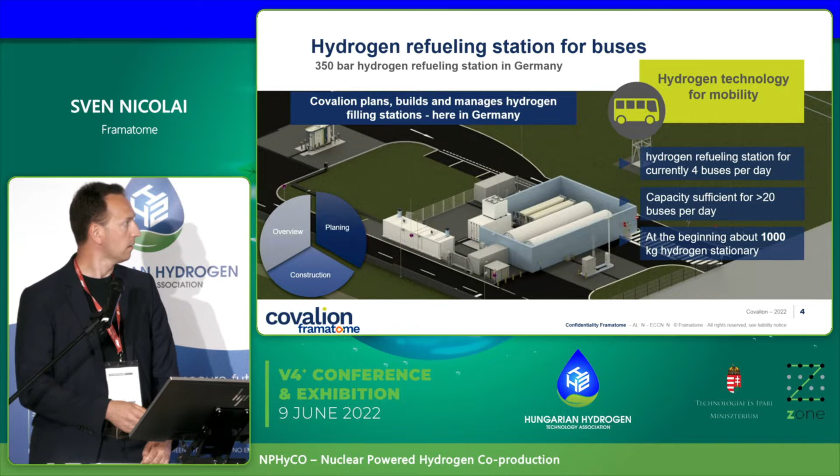Here is an example of the hydrogen refueling station we recently built in Bielefeld. In the beginning there was planning. We build and manage hydrogen refueling stations.

This one here is for 4 buses per day. The capacity is sufficient for a larger version, 20 buses per day. And at the beginning, we started with 1,000 kilogram hydrogen stationary storage.

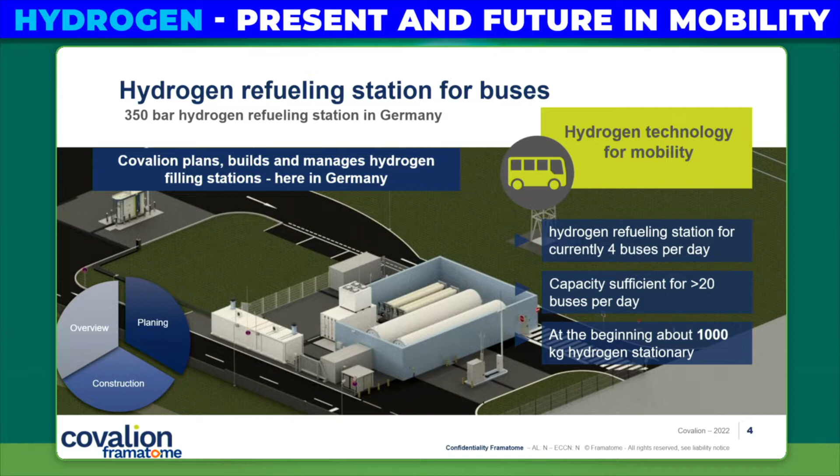Here is a picture taken during commissioning from the top. We did the execution of construction work on site, planning, hydrogen infrastructure, and commissioning.

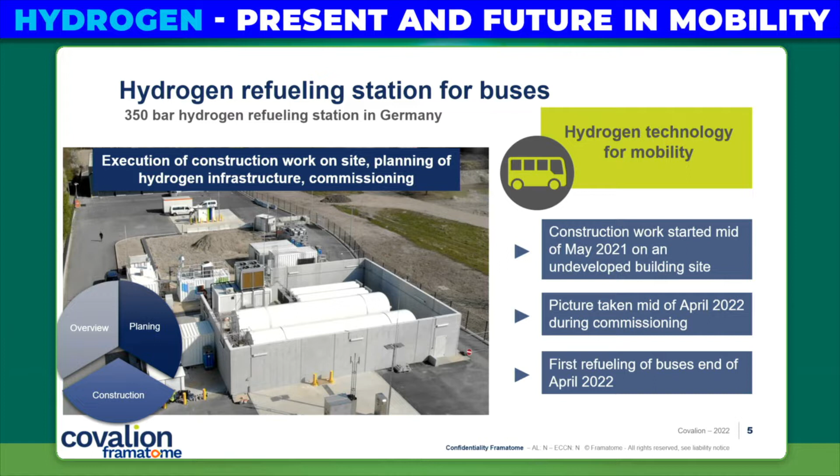Construction work started in May 2021, and this picture was taken two months ago during commissioning in April 2022. The first refueling of buses was at the end of April 2022.

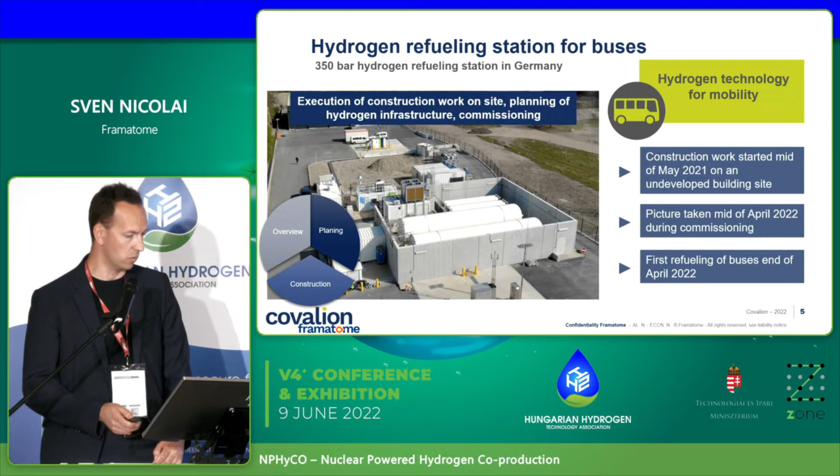So here's an overview of this location. We have the plant control, we have the hydrogen supply via trailer on the left side. We have 2 storage areas: one 500 kilogram at 50 bar, and 500 kilogram at 500 bar.

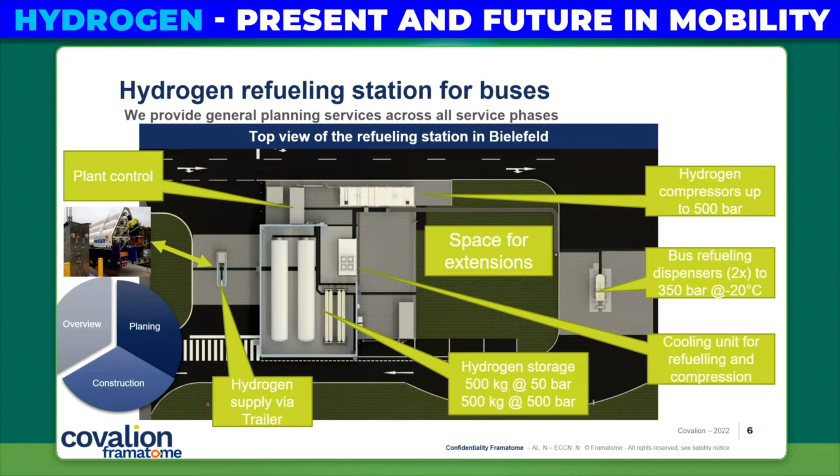There's a hydrogen compressor for up to 500 bar, the cooling unit of course, and then the bus refueling dispenser with 350 bar, times two. And then we have the space for extension for the larger 20-bus version.

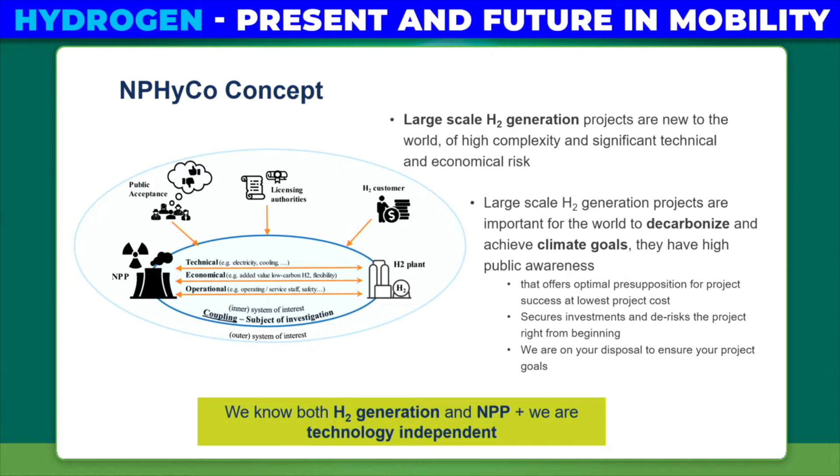So why did this idea come about? The H2 plant needs electricity, needs cooling water, needs deionized water, needs nitrogen supply, and all that stuff. And all of that is available in the auxiliary systems of the nuclear power plant.

Especially in the VVER 440, we know about load-follow operation: when there is a big amount of green energy like PV or wind available, then we have to go into load-follow operation.

This is very difficult for nuclear power plants, especially for the VVER 440 type. This is why this concept, or this study, focuses on the 440 type, but it is open for all the other types.

There are technical aspects, economical aspects, and operational aspects to be considered, which are already available in the nuclear power plant, and therefore OPEX and CAPEX costs could be reduced for the H2 plant.

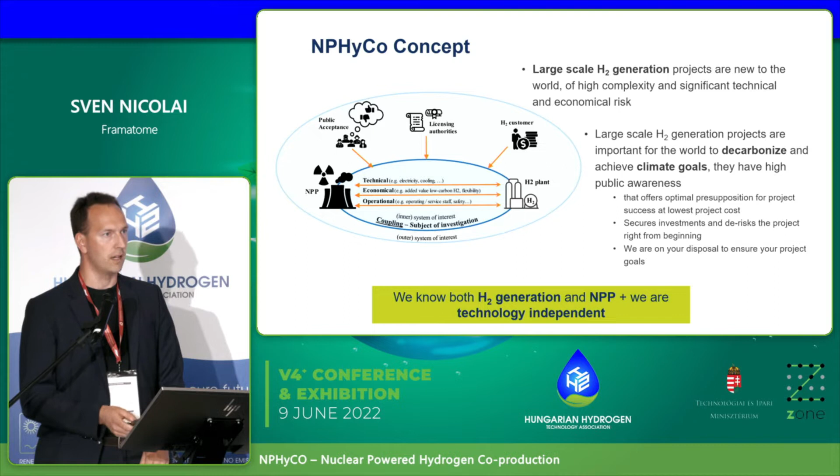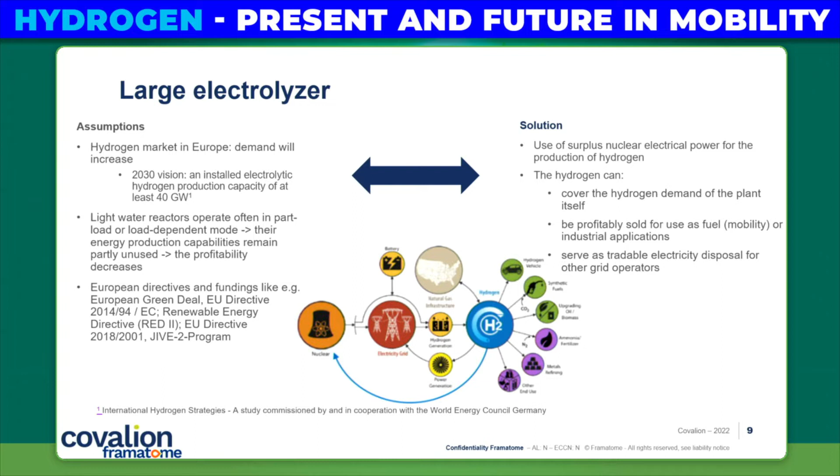As I said before, light water reactors often operate in part-load or load-dependent mode. Their energy production capabilities remain partly unused, and the profitability decreases. So our proposal is to use the surplus nuclear electrical power for the production of hydrogen.

What was said before is that, one week ago, a new directive was issued saying that you need 100% dedicated energy source to get the green label for green hydrogen. This is not considered in my slides, and I think this directive, if correct, needs to be discussed, because there are some problems with it.

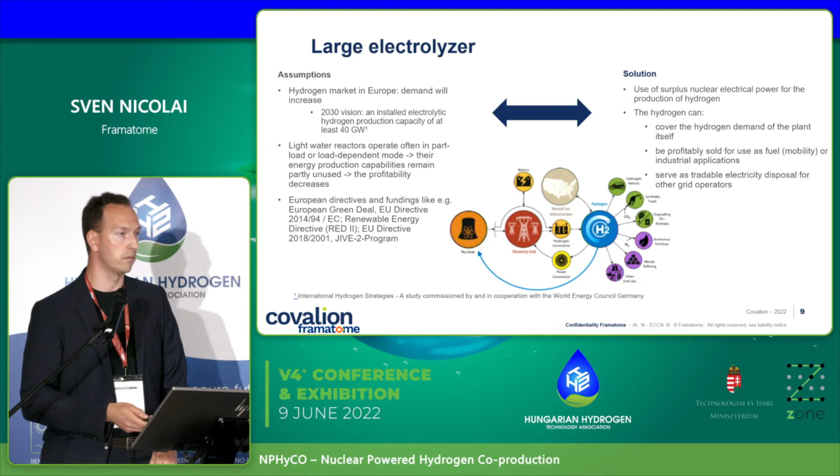So the hydrogen can cover the hydrogen demand of the plant. Hydrogen is used for cooling in the nuclear power plant. It can be used and sold for fuel, mobility, or industrial applications, or serve as tradable electricity disposal for other grid operators, as we heard before.

Advantages of coupled operation of nuclear power plant and H2 plant include reducing the consequences of load follow operation demands, allowing load follow operation without reducing reactor power, and reducing wear and tear on the nuclear power plant's components.

The site advantages on the nuclear power plant side are: cheap and abundant electricity is available, an additional transformer might not be necessary, deionized water is available, additional purification for electrolysis might not be necessary, and the cooling water circuit is also available on the nuclear power plant site.

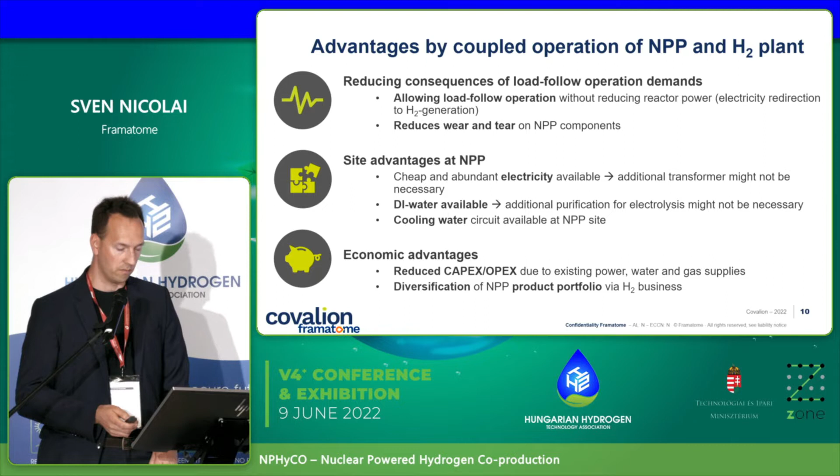The economic advantage is reduced CAPEX and OPEX due to existing power, water, and gas supplies, and diversification of the nuclear power plant's product portfolio via the H2 business.

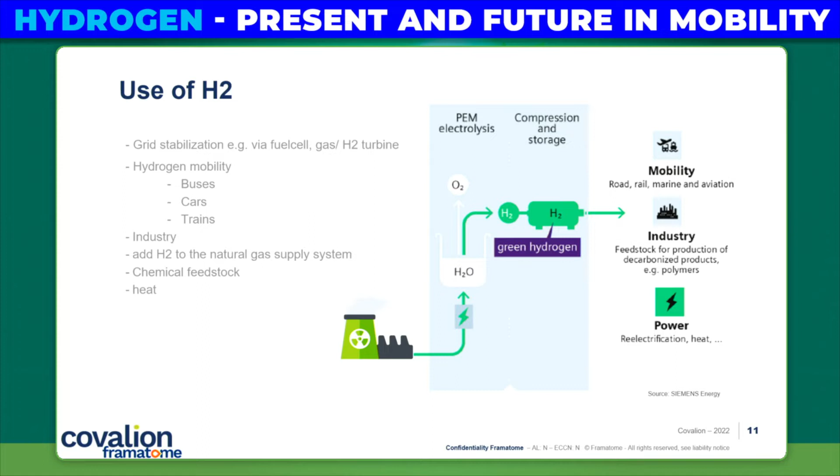Once again, as said also in the other speeches, H2 can be used for grid stabilization via fuel cell or gas H2 turbine, hydrogen mobility for buses, cars, trains, industry, adding H2 to the natural gas supply system, and as chemical feedstock.

So the business case at the top level: you have the nuclear power plant. You sell electricity either to the grid, or you buy it for the H2 plant. And the H2 plant sells the hydrogen either back to the nuclear power plant, or to transportation, industry, or others.

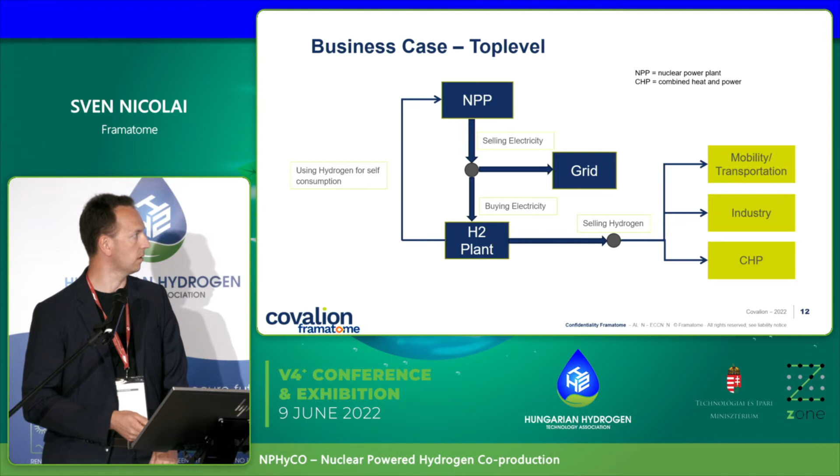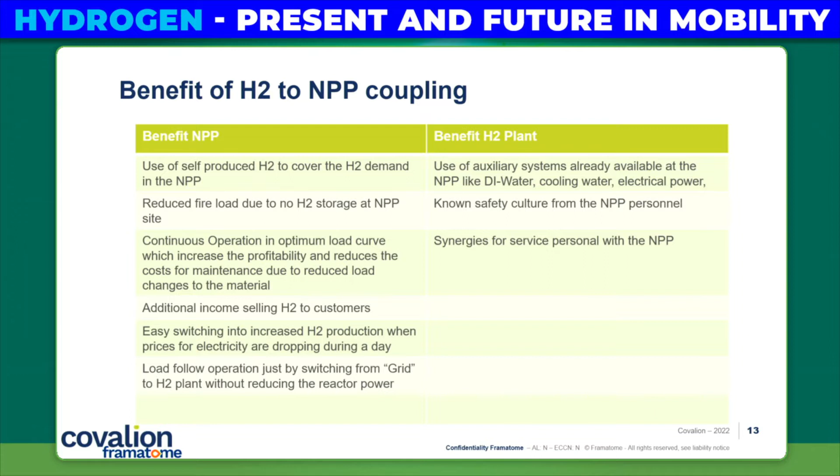So the benefit is self-produced H2 to cover the H2 demand of the nuclear power plant, reduced fire load due to no H2 storage on the nuclear power plant site, continuous operation at the optimum load curve which increases profitability, and reduced maintenance costs due to fewer load changes in the material. There's additional income from selling H2 to customers, and easy switching to increased H2 production when electricity prices drop during the day — essentially load follow operation just by switching from grid to H2 plant without reducing reactor power.

The benefit for the H2 plant is the use of auxiliary systems already available at the nuclear power plant site, like deionized water, cooling water, electrical power, nitrogen supply, pressurized air, etc. There's also the known safety culture from the nuclear power plant personnel, synergies for service personnel with the nuclear power plant, and it can even be operated from the control room of the nuclear power plant.

So, project development: we start with the decision to initiate the project, a feasibility study investigating technical, economical, and licensing aspects, performing a force field analysis, and finding stakeholders, drivers, barriers, and showstoppers.

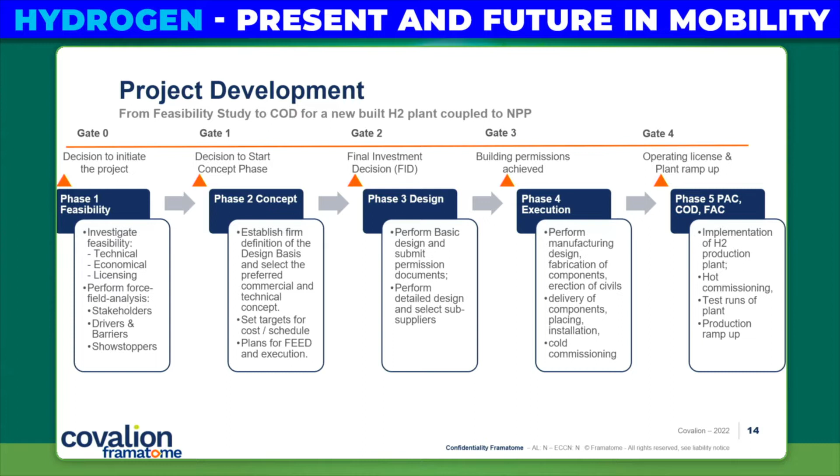When this is successful, we continue with the decision to start the concept phase: establishing a firm definition of the design, selecting the preferred commercial and technical concept, setting targets for cost, schedule, and plans, FEED, and execution. So then we enter the final investment decision.

We perform the basic design and submit the permission documents, perform the detailed design, and select sub-suppliers. Then the building permission is phase 4, and the execution.

Then we perform the manufacturing of the components and the building, erection and civils, delivery of components, and cold commissioning. And at the end: operating license, plant ramp-up, implementation of H2 production, hot commissioning, test plant production, and ramp up.

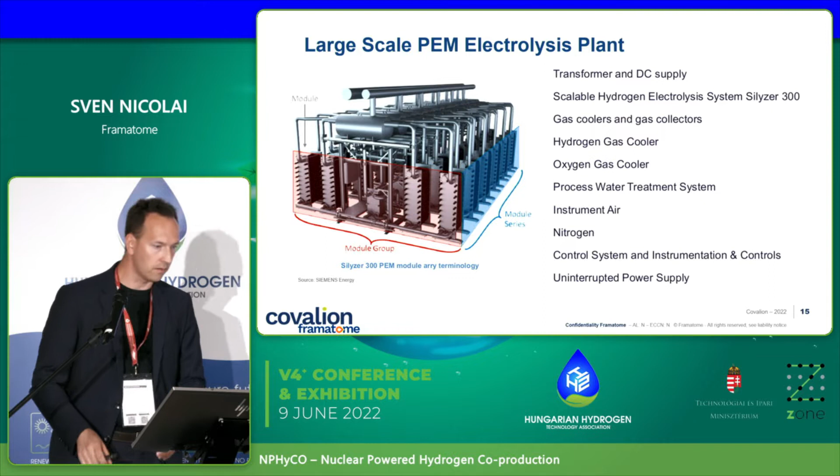This is an example of a Siemens large electrolyzer. We are also cooperating with Siemens. In the front you see one module, and by building this in a row, you can increase up to 100, 200 megawatts electrolyzer capacity.

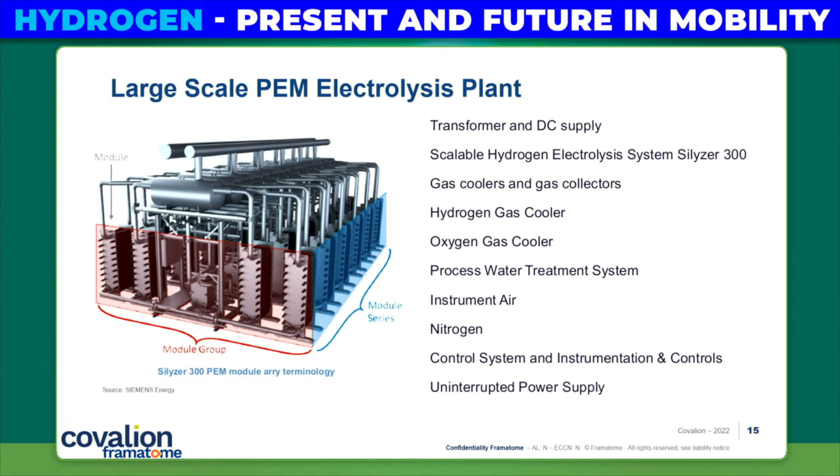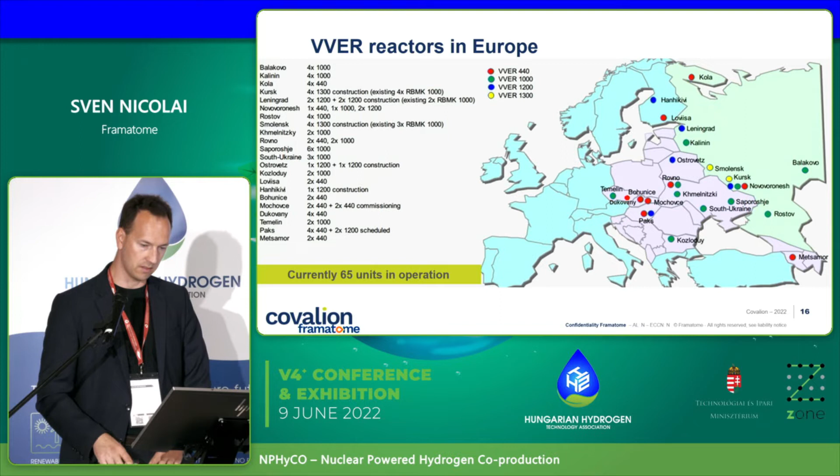This is also from, let's say, better times — this landscape. In red you see the VVER 440 plants. Green are the VVER 1000, blue the VVER 1200, and yellow the VVER 1300. Okay, Russia is not an opportunity anymore, but as I said there...

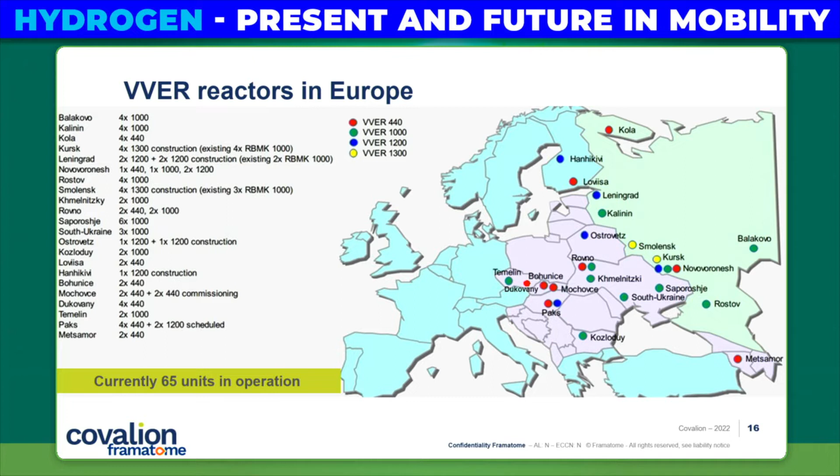Besides that, there is discussion to extend this once it has worked and we have a pilot site defined, to bring this also to other kinds of light water reactors, like in France, the Netherlands, Spain, or the US.

Thank you very much.

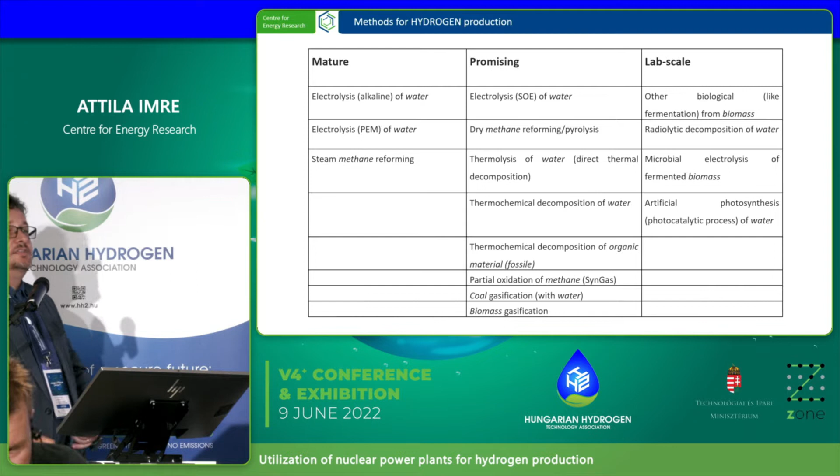So there are several methods to produce hydrogen. Some of them are well developed, some are just promising, and there are several which are only in lab scale. The already existing and mature methods are the electrolyzers, alkaline electrolyzers of water, the membrane electrolyzers of water, and the so-called steam reformation of methane.

This steam reformation is a high-pressure reaction between methane and water, which makes a lot of hydrogen, but it's a gray hydrogen, so we do not like it.

The promising technologies include another electrolysis technique called solid oxide electrolysis. It's a very high pressure, very high temperature technology.

The so-called dry reformation, when the methane is broken to carbon and hydrogen without adding water. The direct thermolysis of water, when the temperature is so high that you can break the bond between oxygen and hydrogen, and from water you can directly produce these two materials.

The so-called thermochemical decomposition, when you are using some additional materials, so the breaking of water is not a one-step process, but a several-step one, using some catalyzer or some intermediate chemical compound.

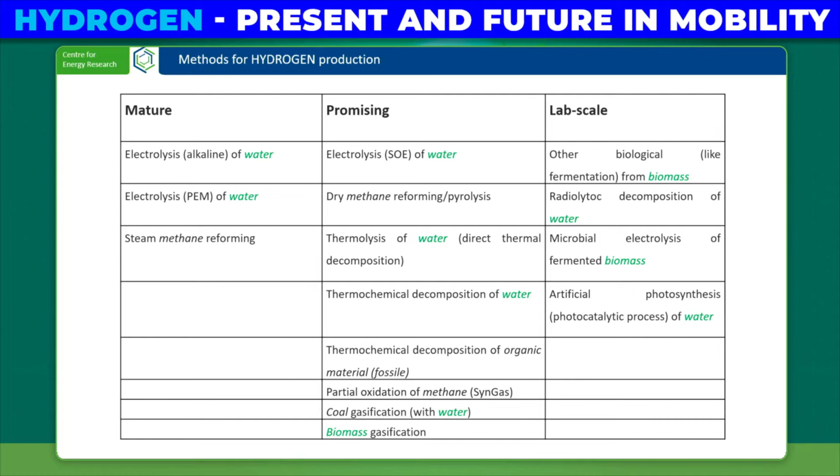Actually, there is one method which is not good: coal gasification. It uses water, but it's also using coal, so there is some carbon monoxide and dioxide involved. So we have to remove this one from our list.

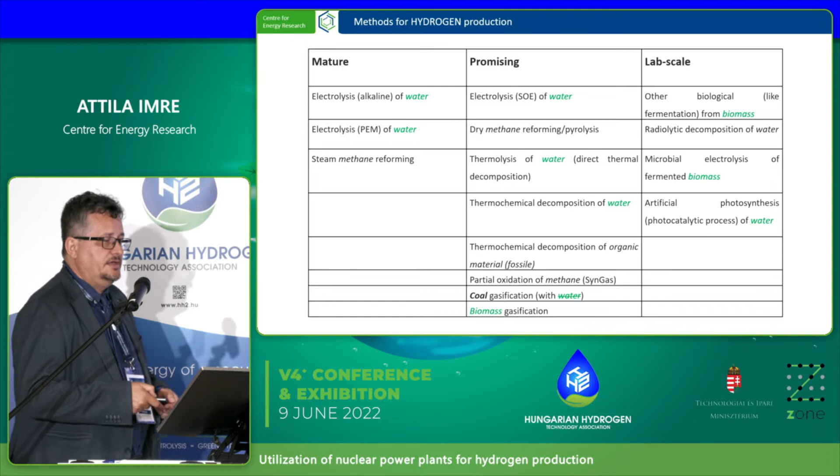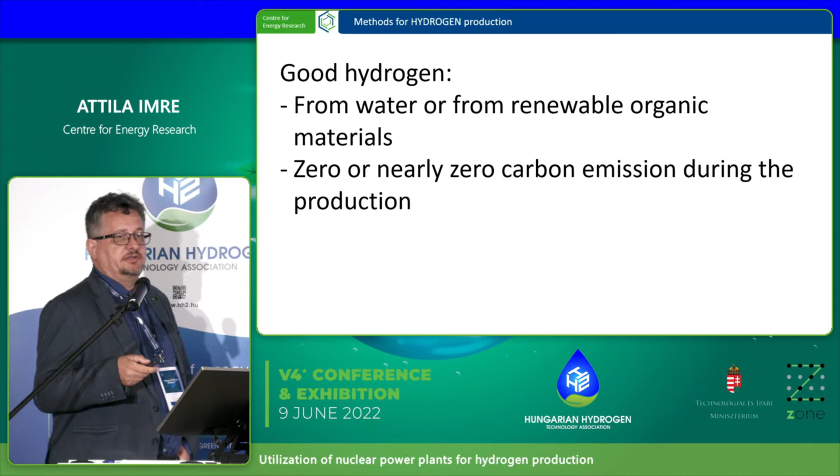What is the good hydrogen? What would we like to produce? We would like to produce hydrogen from water or from some renewable organic materials, and also we would like to do it with zero or nearly zero carbon emission during this production process.

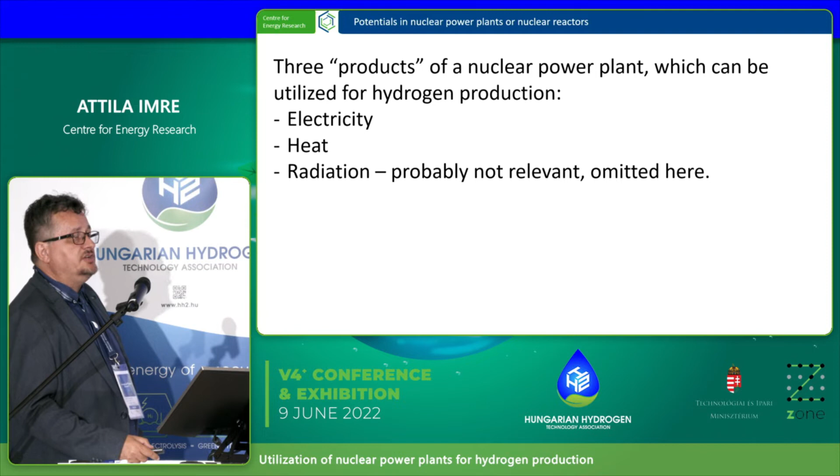What can be provided by nuclear reactors to produce hydrogen? Actually, there are 3 products of a nuclear reactor, or in general a nuclear power plant, which can be used for our purpose. As the previous lecturer said, we can use the electricity - if you have electricity produced by this nuclear power plant, you can do electrolyzers and produce hydrogen. You can also use heat, and additionally you also have radiation, so with radiation you can also produce some hydrogen, but we are not considering this here. Only electricity and heat will be considered.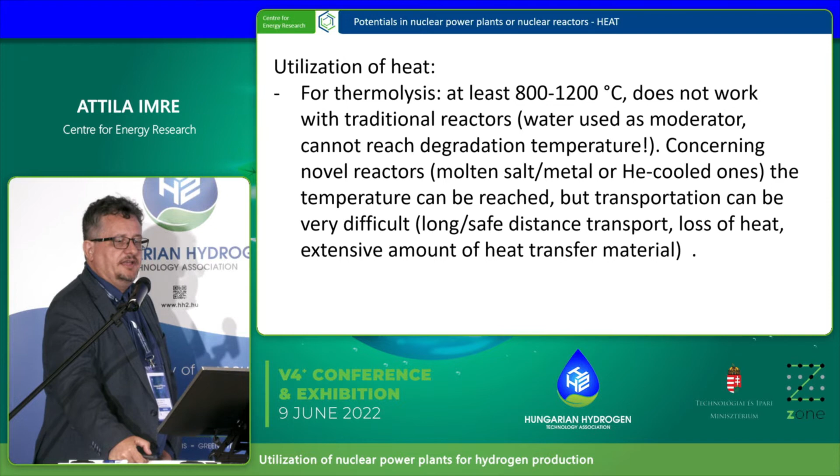1000 centigrade is also pretty high temperature. If we are using a traditional nuclear power plant, like the ones shown before, where water is used as moderator, you do not want to reach high temperature, because the moderator will turn to hydrogen and oxygen, and it wouldn't be very healthy for the reactor.

So this method cannot be used in generation 2 and generation 3 nuclear power plants, which use water for moderator and cooling material. There are some new reactor techniques, the so-called generation 4 reactors. They use molten salt, molten metal, or helium for cooling and also for moderation. In those reactors, theoretically, this temperature can be used, so you can reach 1000 centigrade.

But the problem is that if you want to produce hydrogen with this 1000 centigrade, first you have to take away this temperature for a safe distance, because no one would like to have hydrogen in the middle of a nuclear reactor - it's a very explosive material. And if you want to transfer high temperature material, the heat loss will be quite high, and also you need an extensive amount of heat transfer material, which has to be some very special material, because 1000 centigrade has to be reached.

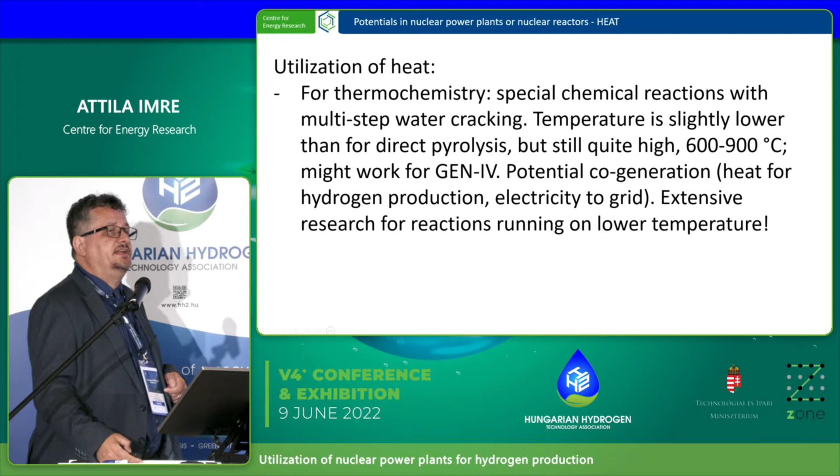The second opportunity is this thermochemical reaction, when you use some material to help break hydrogen and oxygen apart, and it can happen at lower temperature, around 600 to 900 centigrade. This might work for generation 4 reactors. So I would say that if in 10 or 20 years people build generation 4 reactors, it might be possible to build cogeneration reactors or cogeneration plants, where part of the capacity is used for heat and hydrogen production, and part for electricity production going to the grid. This technology needs some further research, but might work in 5 or 10 years.

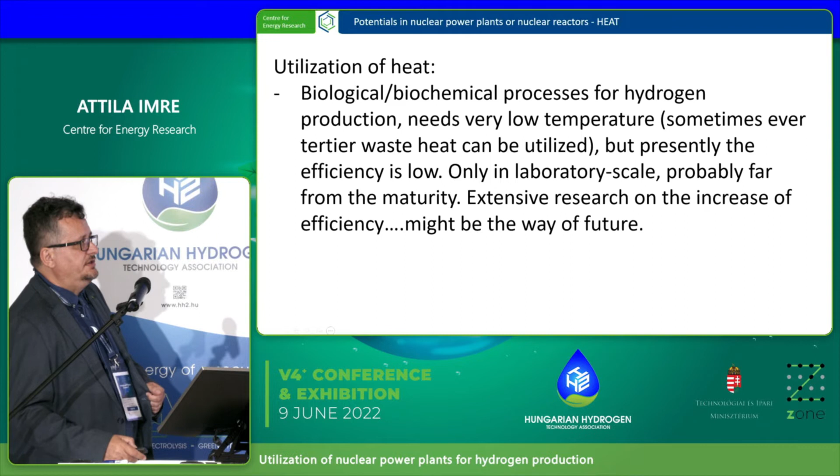The last method concerning heat, as I mentioned, there are some biological or biochemical reactions which can produce hydrogen as a side product. The efficiency is very low, so it's not for mass production, at least not at this moment. There is very extensive research in this field, so in a few decades, or maybe just a few years, there might be some breakthrough.

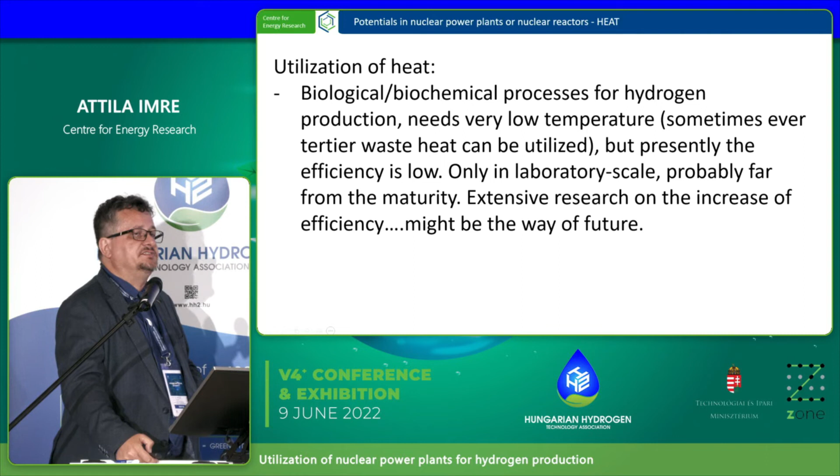The good news is that these reactions need only 50, 60, 70 centigrade, which means that even present reactors can provide this temperature. And for 40 centigrade, even the so-called tertiary waste heat - for example, most of us know the Paks nuclear power plant, where the 40 centigrade water goes to the river Danube and makes it too hot in summertime - this would be a much better use for that water.

For productions using heat, there is one general problem. When you are cracking water, hydrogen and oxygen will be produced in the same place. A mixture of hydrogen and oxygen is an explosive material, so you cannot do it too close to the reactor - you need to do it at a safe distance.

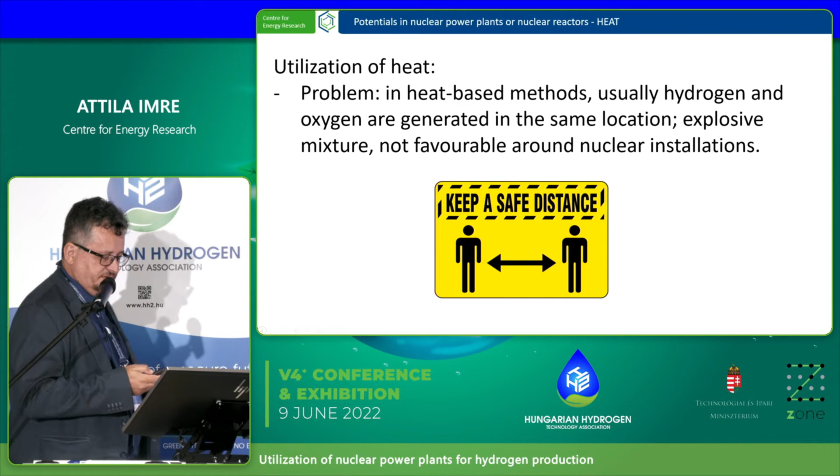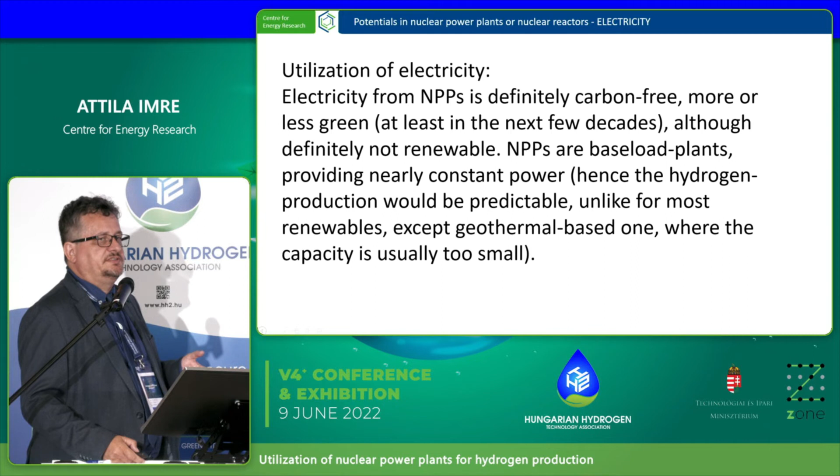The second way is to use electricity. Electricity from nuclear power plants is definitely carbon-free electricity. We can talk about whether it's green or not, but presently it's considered green, though it's not renewable electricity. What is very good for us is that nuclear power plants are so-called baseload plants, providing nearly constant power, unlike the very fluctuating power from a photovoltaic plant. Therefore hydrogen production would be predictable, and people in industry like predictable methods, not very scattered ones.

As I mentioned, there are at least 3 different types of electrolyzers. The one considered best presently is the membrane or PEM electrolyzer. These can handle fluctuating power, so they can be used with photovoltaic power plants, but they are quite expensive. The so-called alkaline electrolyzers, which are inexpensive, or the solid oxide electrolyzers, which are also expensive but very efficient, need constant power, and this constant power cannot be provided by wind or solar sources.

So therefore it might be a good solution to use nuclear power plants for this purpose. Actually there are 2 opportunities. First, we can build a huge photovoltaic power plant when we have a lot of surplus energy, but we are not using the surplus energy - we use the basic part of the produced energy to produce electricity and hydrogen, because in that case we can use, for example, solid oxide electrolyzers which can work at very high efficiency. Or we can build nuclear power plants, or use nuclear power plants, for the same purpose.

Of course, very green people would like to say let's build photovoltaic power plants, but we should also consider that hydrogen needs to be transported away from the production facility, and usually nuclear power plants have very good infrastructure. There are roads, so it might be much better to produce close to these facilities.

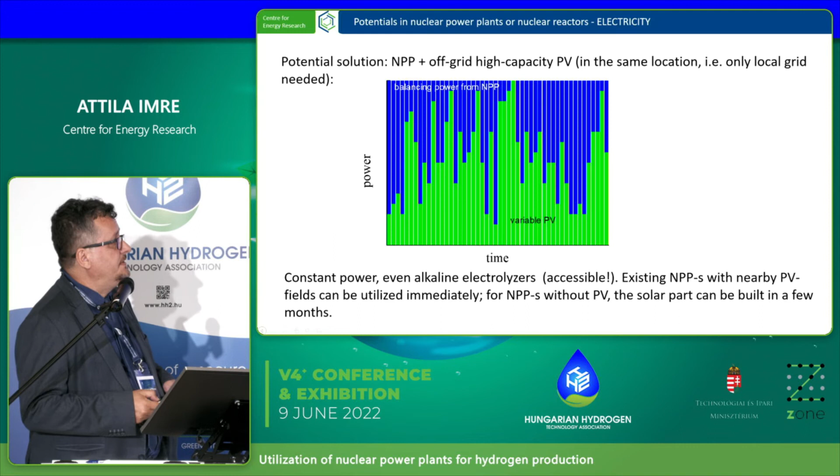I would like to say that the best solution would be a combined effort. You can see the green part - that's a photovoltaic off-grid high-capacity power plant. You can see that the power is changing pretty much, which means you cannot use it for alkaline or high temperature electrolyzers because they need constant power.

But I would say, let's take a nuclear power plant and have a balancing power taken away from this nuclear power plant - that's the blue part. So the green part is from photovoltaic, add some blue from nuclear power plants, and in this way we can provide constant power which can be used to produce hydrogen by electrolysis day and night.

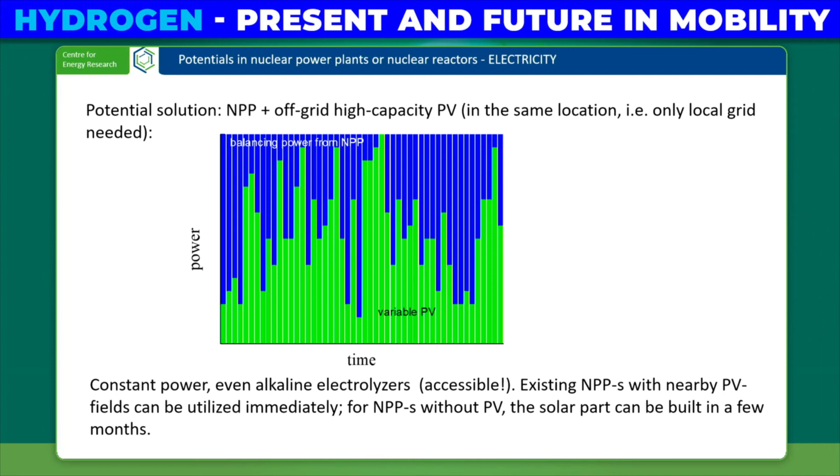And the good thing is that practically this could be done in a few months, because we have nuclear reactors, we have photovoltaic power plants, sometimes we even have them together. So all we need is electrolyzers. Electrolyzers are very expensive now, but that's mostly for the membrane electrolyzer. If you would like to buy alkaline electrolyzers, you can do it for much less expense, and you can buy even a few hundred megawatts if you need it.

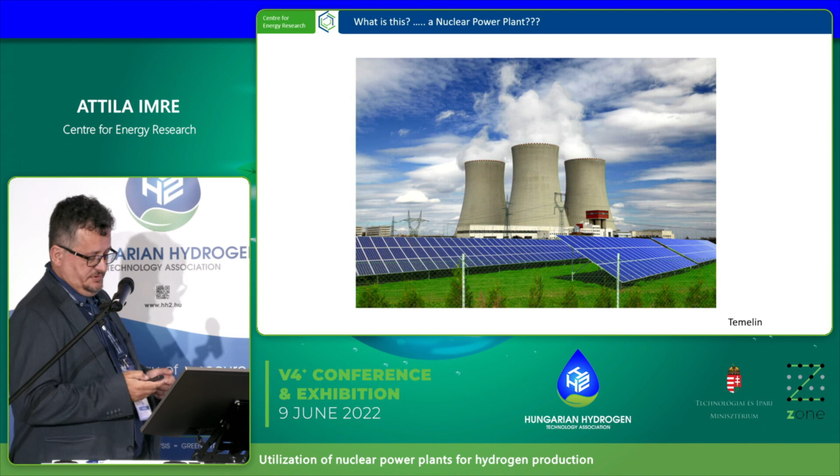So, of course, it needs some money, but everything needs money. And thank you for the opportunity.

Thank you very much. So nuclear power plants can play a very crucial role in this whole hydrogen ecosystem. Thank you very much for this presentation.

So I think the key message is that we have to think outside the box in a way, because we are talking about a brand new thing and we have to find out which is the best way to develop. But at the same time, we have to use our current facilities, like the pipelines, like the nuclear power plants, etc., and we have to put it in a broad context. How can we use hydrogen in the near future? One thing is very clear: we have to think about it and we have to use it. We do not have too many other choices.